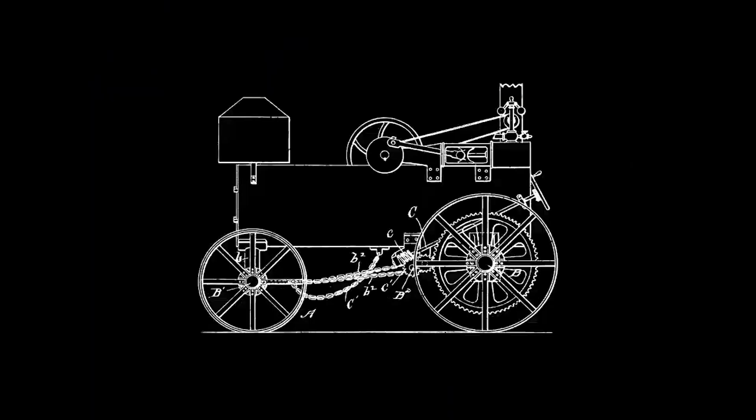You are everywhere. Yet, sometimes out of reach. You move us forward and bring us together. And together, we're on a journey towards the future of energy.

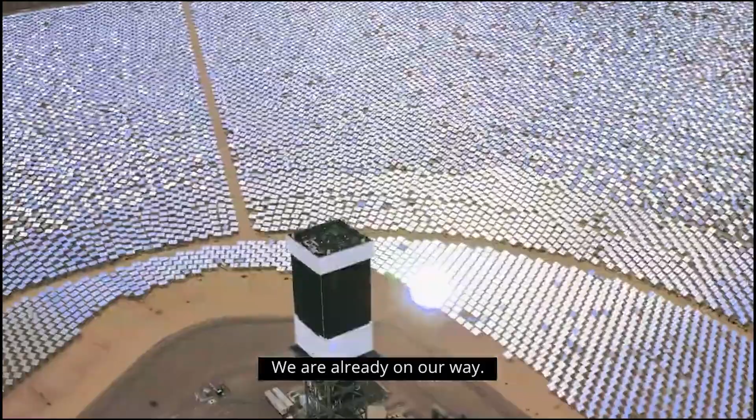So what will it look like? It's hard to say, but we know it will be sustainable and abundant. We're already on our way, with a common purpose, each of us playing our part.

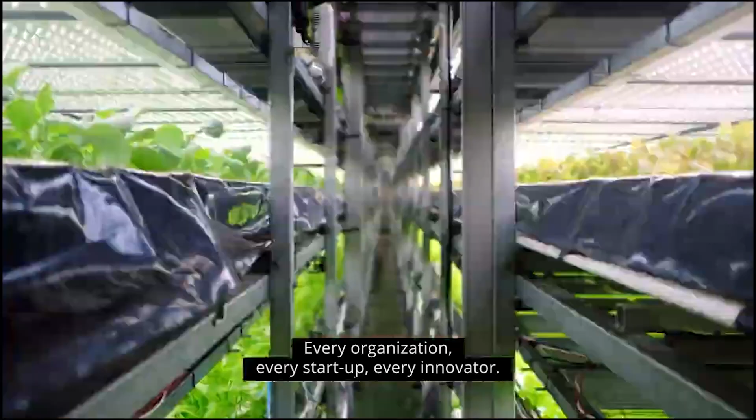At Deloitte, we're connecting every bright mind, every organization, every startup, every innovator. Every citizen, CEO, and regulator. Making this future happen won't be easy, so we're developing practical solutions and a clear roadmap to help our clients on their way.

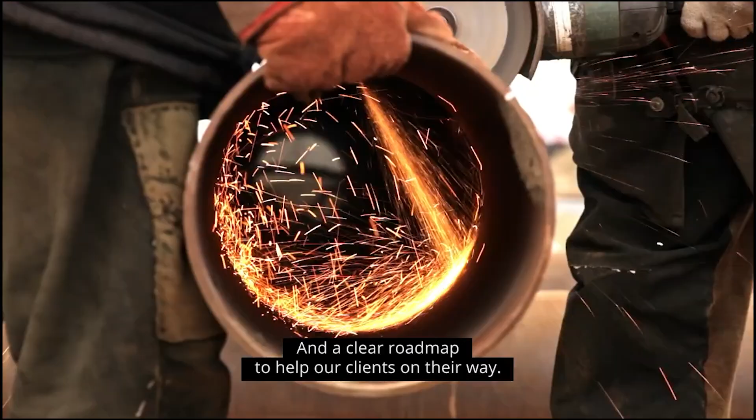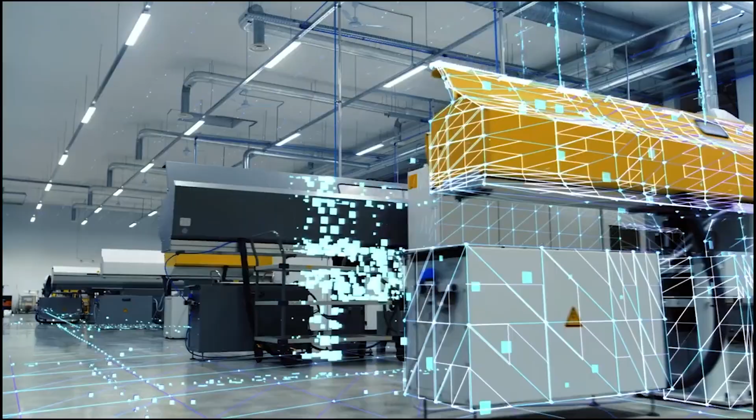We'll keep making those connections. Each step well planned, moving forward together, to make our new energy future a reality. Let's connect for a new energy future.

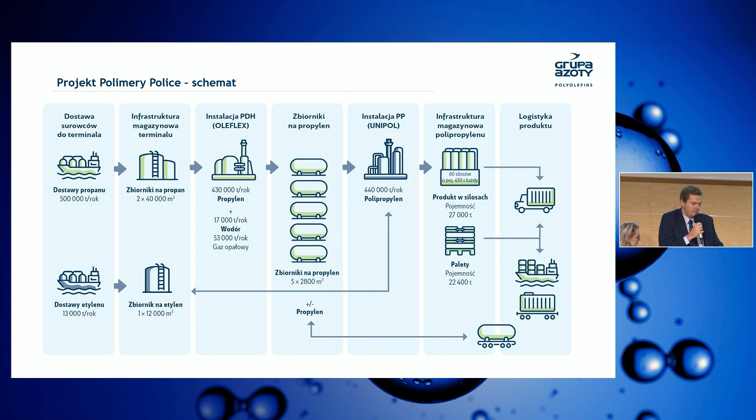It all starts in the newly built terminal where we take in propane and ethylene in cryogenic form. Then we send it to installations dehydrogenizing propane. And today I'll tell you more about this installation, since hydrogen is created as a side product here. And it can be said that our company is conducting this entire production chain until polypropylene is produced.

Currently, we're using hydrogen by sending it for synthesizing ammonia in the Police chemical plant nearby. The technological processes at the PDH station deal with separation of the product and the side product and hydrogen.

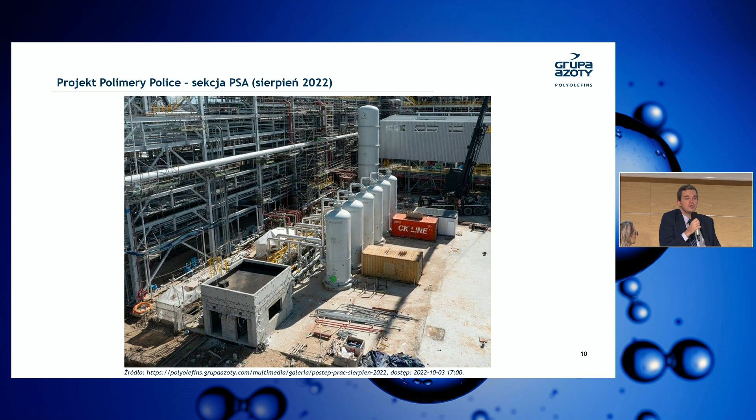Of course, pure is relative here. For us, it's very pure. The main principle here is that we go through adsorption of impurities, and later the adsorption beds are purified, and we get two streams, a stream of clean hydrogen, and on the other side remaining pollution, and we use these gases in our installation as heating gas.

So now we can move on to the part connected mostly with safety. And here I'd like to present to you two ideas which deal directly with the question asked by Aleksandra, that is safety, how we approach safety. In brief, we could say that we have two main approaches which are interconnected.

First is the so-called rule-based approach, standard-based approach. Here we use all the standards which deal with safety, starting with the Seveso directive, ATEX, PED directive, fire safety regulations. As far as Polish norm standards and foreign regulations, we also have conclusions here from historical processes and literature.

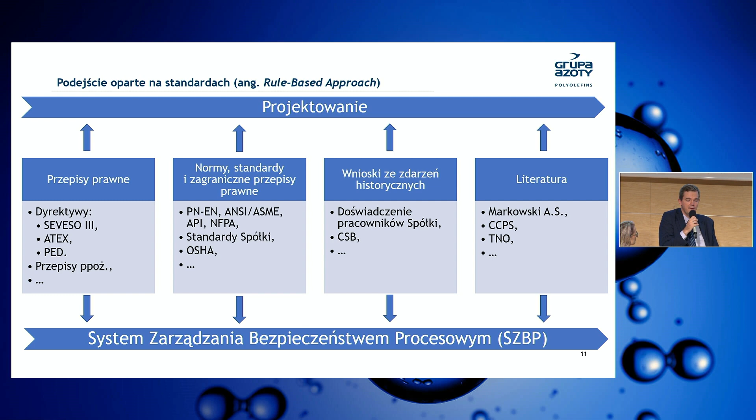Now, all these sets of information have certain rules which have already been prepared based on experience, and they affect our processes as far as planning, that is the design process itself, as well as the second very important phase, which is not seen very well, the phase connected with the functioning of organization, the functioning of people. Everybody knows that safety is closely connected with operation.

Second point, we are not able to cover all individual configurations of the plant, all the individual aspects, despite the fact that we're using installations where you have hundreds of such examples throughout the world. We are amending this approach with risk assessment, so it's essential to realize that safety requires not just fulfilling minimum requirements, minimum regulations, which are not always in line with cost assessment. However, in our case, this approach connected with standards has also been amended by highly assessed risk analysis.

I'd like to present three parallel pathways which have proven themselves to work. Of course, there are many ways we can follow here, many methods, but the one we've used is a compromise between the time that is needed, because we know that the risk analysis are time-consuming and costs also matter.

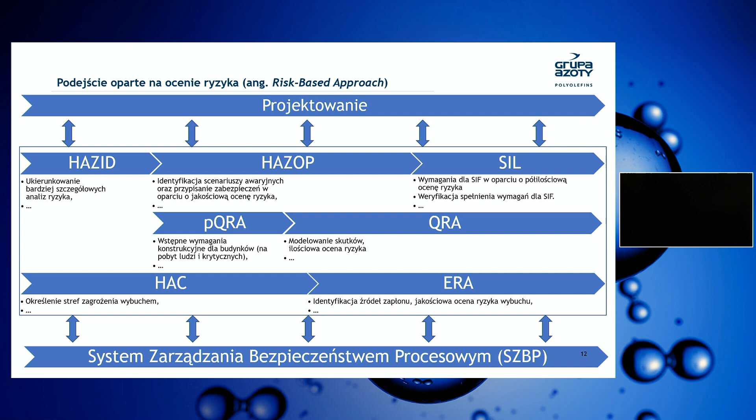So the three streams: the first stream, as far as analysis, it's hazard-based analysis, hazard identification, identifying hazards, risks, which is carried out at the very early phase. We identified all the hazards and are able to direct further analysis, so they give us background for further analysis.

As far as HAZOP analysis, this is a well-known analysis these days. It's already part of the main stream as far as investments. In HAZOP analysis, we create scenarios, so we have particular phases of safety procedures, as far as any potential deviation connected with improper use or functioning of installation is identified.

And thanks to that we are able to identify deviations, provides wonderful material for designer or even such people as myself who manage safety at the operational level, where we see our barriers, because key issue here is assigning to each threat or cause a certain safety mechanism, and we have a certain set of mechanisms of barriers we can manage.

In parallel to it, we have a quantitative risk analysis pathway where we conduct analysis of consequences of results, which gives us certain guidelines to the construction, architectural design, and this is supplemented later with further quantitative risk analysis, QRA, and we can use it to plan certain safety, rescue operations. It allows us to study quite closely all possible situations, scenarios which can take place due to lack of sealing.

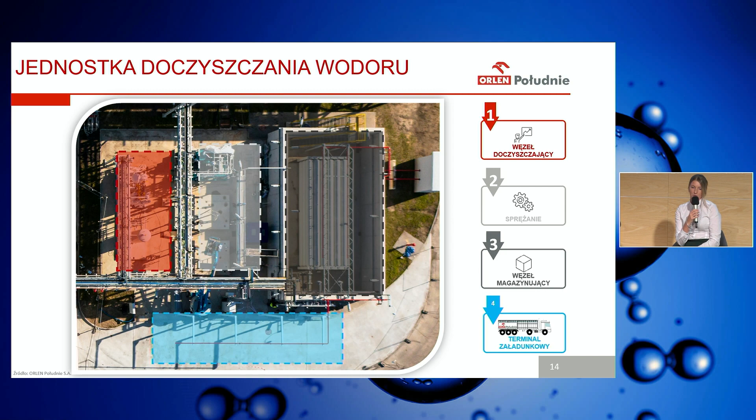On the picture, you can see the installation is divided into 4 sections. The first section is the extra purification node, the same as in Police, the module. Then we have a compression module, then storage module, storage node, and loading module. The main goal here is to produce hydrogen of automotive quality.

If we are talking about this type of production, I think one of the threats here that we have in this installation are the compressors, due to the fact that in order to obtain hydrogen of automotive quality and to effectively transport it to hydrogen fueling stations, we have to compress it.

And compressed hydrogen, this is 400 bars that it's compressed to. So we have relatively high pressure in the installation right away. We use membrane compressors here. The pressure, as you can see on the slide, is 405 bars.

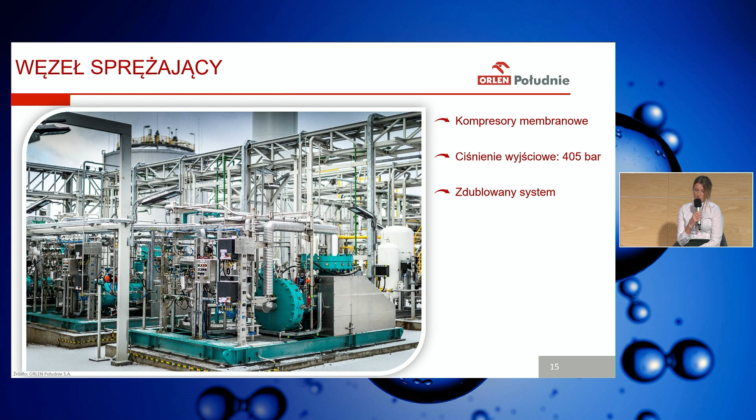Due to process reasons, and also to protect us from a possible breakdown in this unit of a compressor that would stop the process, we've doubled the system. So if we do have a breakdown, we can use the second one.

So once we have compressed hydrogen, the next section is the storage node, storage module. One might say this is the most hazardous, the most dangerous node we have, because here we have a lot of hydrogen, about 1,300 kilograms, and a high pressure, 405 bars, and a lot of connections between these tanks. As you can see on the picture, these are horizontal tanks that are interconnected, and there are 18 of them in total.

They're divided into 3 sections. One might say we generally have a low pressure section, a mid pressure section, and a high pressure section. As you can see on the diagram, they are placed within a specific protective wall.

The wall creates a certain barrier, certain protection. So in case of an accident, a potential explosion, the wall is meant to protect the infrastructure created all around - that is buildings and other tanks which store other substances needed for different processes. So it is a certain barrier.

I think it's also worth mentioning that in case of a leak in such a container, or a crack in it, as various things may happen, this wall can also constitute a barrier for such a stream of hydrogen under high pressure - again, it's 400 over 400 bar. It could be a threat to those walking about the plant and also to the buildings surrounding it.

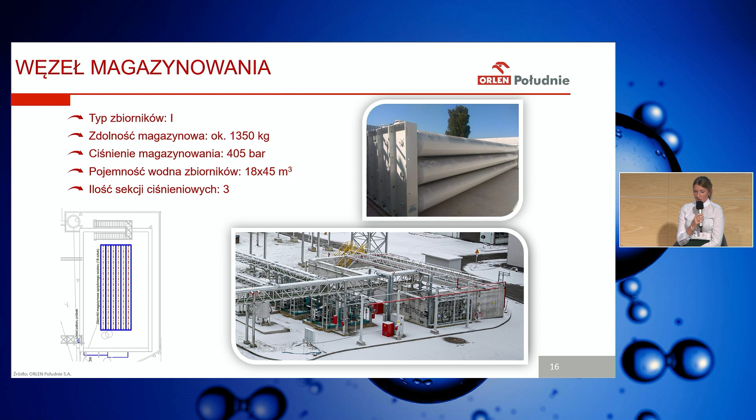When speaking about safety measures, yet another portion of those are hydrogen detectors and flame detectors. I think that you would find such pieces of equipment at any systems resembling ours. Their task, even before alerting the workers, is that they need to inform that there might be some higher concentration of hydrogen, which could potentially mean that there is a leak, and that leak could be dangerous. Such hydrogen detectors inform about the concentration that is far below the lower limit of the explosion threshold.

The first alert goes off at 20% of the lower limit, and the next one at 40% of the lower limit. Those detectors have sound and visual signaling systems, so if somebody is around them, they are informed with sound and also light that there is a potential threat.

The system is also equipped with CCTV cameras, so the controllers in the switchboard in the main room have control. They monitor the area, and they can also always check whether anything potentially dangerous is happening. These are high-resolution cameras.

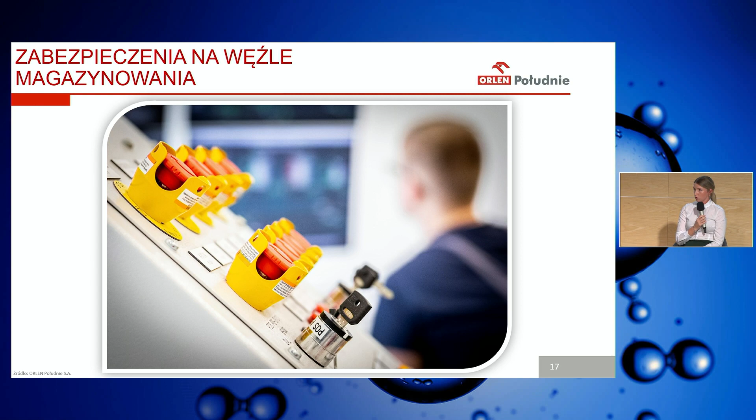And I think that's all in terms of the protective measures that we have at the storage node. So I give the floor to another speaker.

Thank you very much for sharing this interesting, rich knowledge. We've seen the production and storage, both in Azoty Polyolefins and in ORLEN Południe, ORLEN South. There are very restrictive safety-related procedures, as confirmed by the speakers.

We can see that hydrogen economy is developing in Poland. Completely new investments are planned, including investments concerning hydrogen infrastructure. The amount of compressed gas in those installations can vary from a few hundred kilograms to several tons.

So now, Zdzisław, I will address a question to you. I've been wondering for quite some time now about the issues concerning the Seveso directive and the limits for hydrogen set in this directive. Let's move back now to Gdynia.

So we now travel from Trzebinia back to Gdynia. Is it possible to place a 7-ton hydrogen fueling station and storage station in the middle of the city? Let's also look back and analyze some failures in which hydrogen was involved, and also the protection measures at increased risk work sites. Thank you very much, Aleksandra.

I like the first question very much. So, a classic question: can you actually place a station for 7 tons of hydrogen in the middle of a city? It's a very provoking question. We talk at a rather high level of generality.

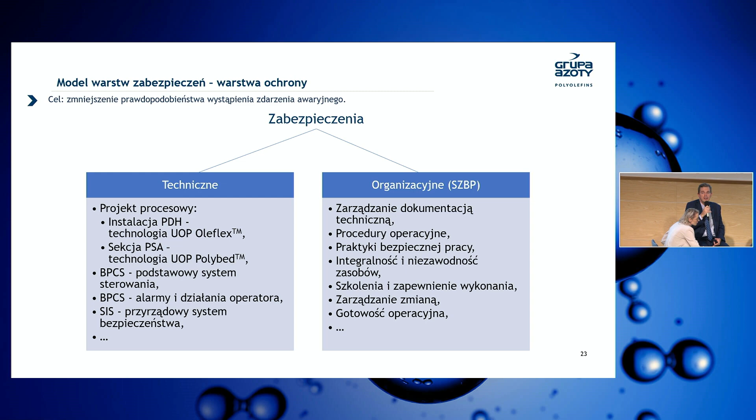Here we have limiting of human error using certain control systems, which are obviously not foolproof, but nevertheless automatization does help us. We introduce alarms, we train our operators and personnel how to respond to alarms.

And sometimes, of course, there are situations when human action is not sufficient. We know right away that it's not possible for a human to react.

We have these individual functions which have been analyzed, which, regardless of human action, can bring the threat to a safe level and alleviate risks.

As far as organization, we can talk about the entire system of managing safety processes, so we are talking about a company.

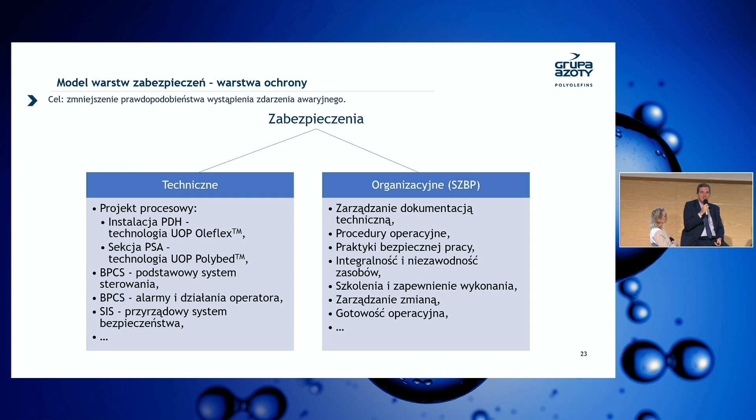Where there are no specific requirements regarding process safety, sort of these below-threshold companies, any decisions of vital nature should be methodically and systematically used as far as the layers of protection.

Putting it briefly, the most important aspect for hydrogen, I'd like to point to the second position: technical measures, ATEX, everything connected with sources of ignition, which has already been mentioned, and a very low minimum ignition energy.

Especially when we are talking about investments, if we are using automated systems, etc.

We have thousands of pieces of equipment there, so the most important thing is to simply keep an eye on it. The way it is in industry, in sales and marketing, 80-90% is a great idea, right? But in industry, as far as safety, there's only one good solution: 100%.

So in our case, only one or two devices which are not properly maintained, an unfortunate situation, bad timing, and we have a tragedy, right? So we need to be very methodological and careful, we need to have proper certificates, and install devices in the proper way.

Another issue is systems of detection, of detecting gas, which has already been mentioned: fire safety signalization, infrared detection.

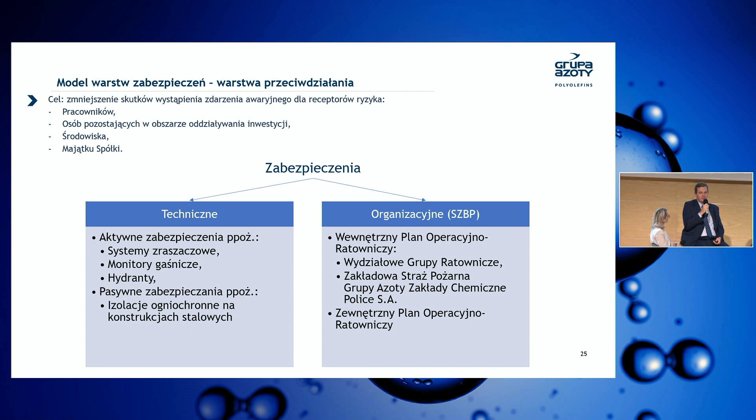That's obviously very important, as is cooperation with the national fire department, the state fire department. We have the same goal after all, so I'd like to encourage you to be very open in contact, so that together these solutions can be implemented. As you can see, it's a very complex and complicated process.

And it's definitely worth systemizing, because this gives us a guarantee. This tedious process gives us a guarantee of reaching 100% effectiveness.

Thank you very much. Hey, ladies and gentlemen, we have gone through production and storage. The next node is distribution.

So let's move to Trzebinia again. Paulina, I wonder about the way and distribution in your installation. And please, if you could also tell us a little bit about the vehicle that you're using to transport hydrogen.

Of course, thank you very much for the question. As I've mentioned, the process is quite heavily automated, so that we can avoid human error as far as the loading terminal.

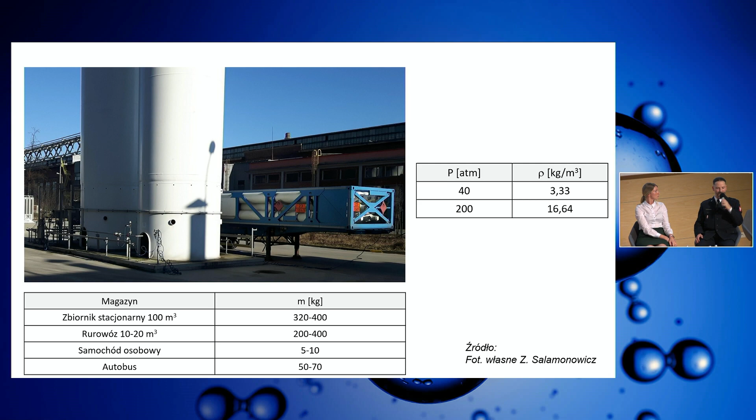Different is the case with composite containers, those used for filling up the cars. They get fragmented, they get burned through. This pressure appears in this porous mass, and they are torn apart into a few elements, and they constitute a greater threat.

What we have to face as firefighters, what we are concerned about, is not so much the destruction of the container itself. To withstand such great pressure, those containers have quite a thick coat of outer casing, but the infrastructure connecting particular containers is one of the most strategic elements, and it is at risk of getting damaged.

Let's say the vehicle turns upside down. The containers will not be shattered, but there should be a safe cage so that the links between them, the parts connecting them, are not damaged. Always in such cases, what is key is this box in which the entire set of fittings is hidden.